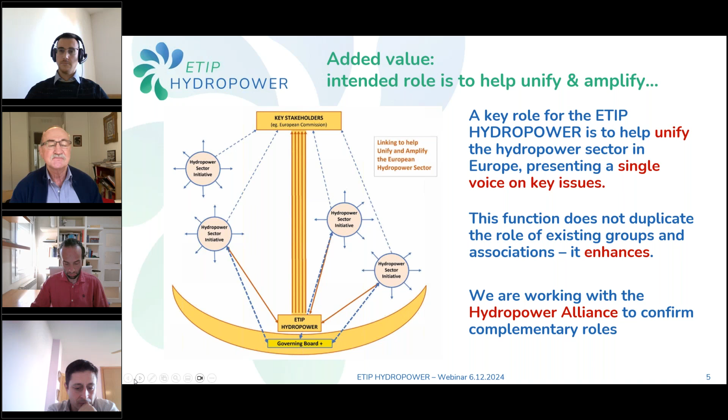What we have done, important for all those working on research projects, is establish a HERI platform which gathers all research projects ongoing in Europe. We try to gather all of them in our platform, not only at the European Commission level, but also what is going on in the different European countries.

We have also established 4 working groups, active since early summer this year. The first is hydropower's role for flexibility and storage, then hydropower and biodiversity, and third, hydropower and climate change. Then we have a cross-cutting working group on promotion, dissemination and uptake of past and current European research and innovation projects, which organizes these webinars. The working groups will publish first results during our Hydropower Day, on 8th of April next year in Brussels.

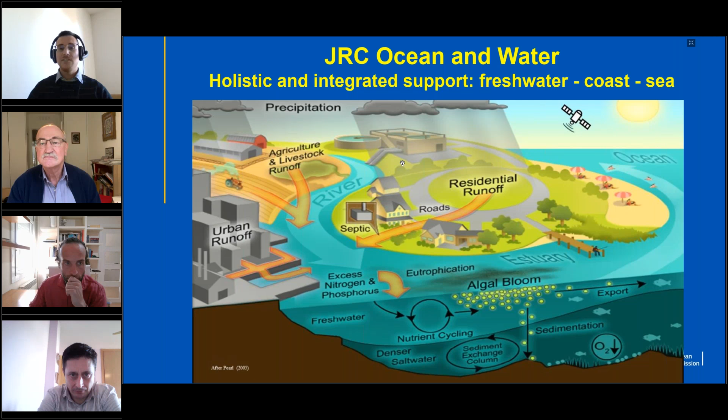Today we'll present several activities we are conducting at the Joint Research Center of the European Commission, in particular this recently published annual report. I work at the European Commission, in the Ocean and Water Unit, where our aim is to support the policy-making process by providing scientific and practical evidence to policymakers. My Ocean and Water Unit is in the Joint Research Center of the European Commission, which is a directorate of the European Commission. Here you can find some of the water legislation we have supported with our scientific research, ranging from water in agriculture to ocean, hydropower, rivers, and so on - all kinds of waters.

Today I will talk about a different activity. I will provide a summary of the exploratory activity where we assess the European Union's potential of new sustainable hydropower, in particular hidden hydropower. Then I will talk about water energy storage in pumped storage hydropower, which was published a few days ago. And then the main topic is the Clean Energy Technology Observatory report, an annual report on hydropower and pumped storage hydropower.

A slide to present the already finished exploratory research on sustainable hydropower. I already presented this result in past webinars and conferences, so I will just provide a summary here. We have discussed and published several results, for example on the potential of refurbishment of existing hydropower plants in the European Union. We have also provided an assessment on the use of hydropower in historical non-power barriers and non-power dams. We've investigated the potential for hydrokinetic turbines and also hidden hydropower in water distribution networks and wastewater treatment plants. I could provide references, but also in the report I will discuss there is a table with all these solutions, discussion, and data, like the additional energy generation we can obtain by these strategies.

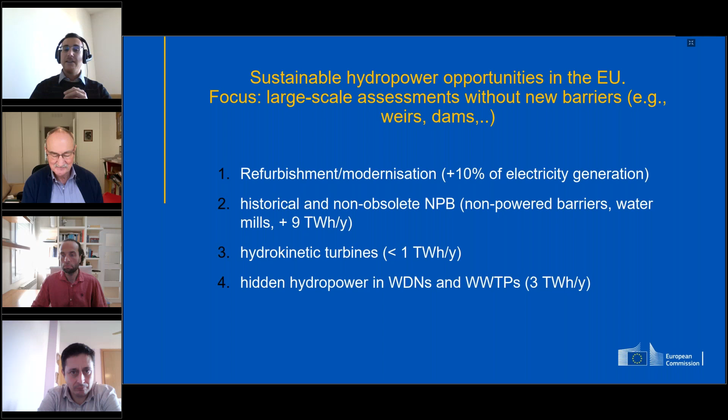Another important activity we have finished is the quantification of energy storage in hydropower reservoirs and pump storage hydropower. We found that in literature there are several sources of data, and often these sources provide different data. Sometimes this data on energy storage is not well defined - it's difficult to understand, for example, if they include the cascade effect or not, or if they are talking about a theoretical energy storage capacity or a technical economic one. So we tried to bring some order to this and published it a few days ago.

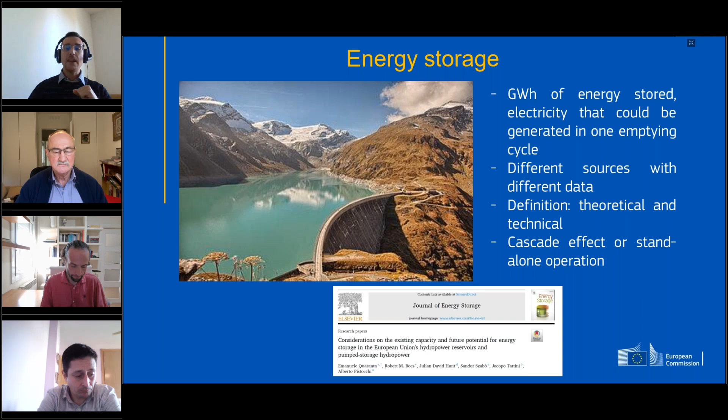Here is a summary of our results. We provided data and calculations both for pump storage hydropower and also for traditional reservoir hydropower, calculating a sort of theoretical energy storage, which is practically the head multiplied by the volume of the reservoirs. Obviously, the smaller reservoir limits the potential. Then we corrected this theoretical energy storage potential, calculating a technical energy storage potential, considering some reduction coefficients, for example the efficiency, or the fact that not all the volume can be used for safety reasons.

We compared this number with the reported energy storage capacity found in literature. We found that there is agreement, but also some differences, and these differences are well discussed in the paper. I will not go into details now, otherwise it will take hours, but you are encouraged to read the paper and provide your feedback and constructive criticism. It's important to show this data because by comparing this number with numbers from other studies that show the future potential, it's possible to understand really how much the future potential is.

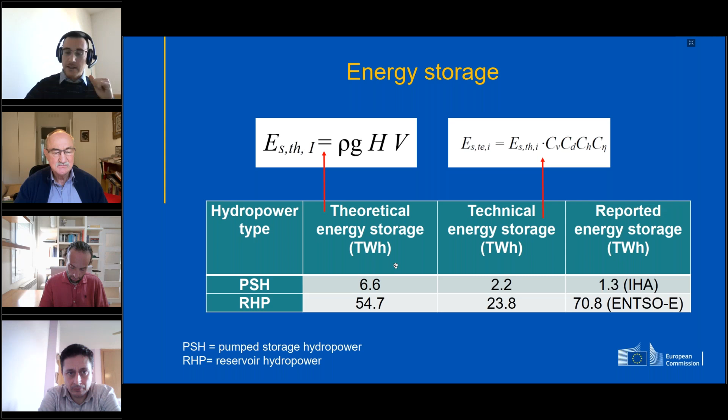This is shown in these slides. Here is the energy storage capacity in existing pump storage hydropower plants, the theoretical potential I showed you in the previous slide - this number, 6.6, is this one. This is a logarithmic scale. Here you can find results from other literature studies that have identified the future possible potential of developing new pump storage in the European Union. You can see that the opportunities are a lot - the available potential that can be exploited, the sum of all these strategies, is much larger than what we have. So technically speaking, in the European Union, there is still potential for new pump storage hydropower.

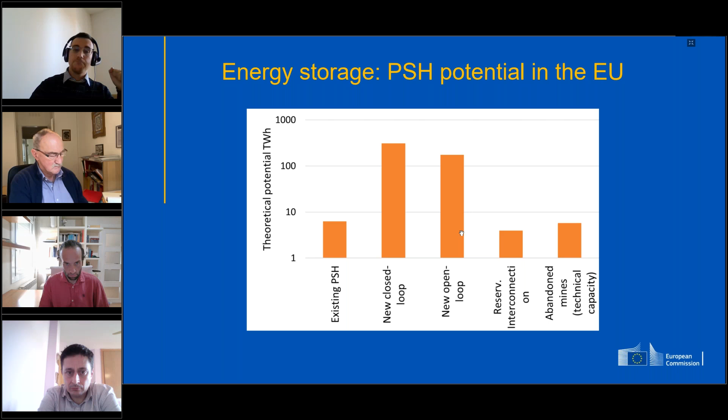For example, from new closed loop pump storage or new open loop systems, but also by interconnecting reservoirs or by using abandoned mines. The problem is that most of this potential currently is not economic because of market limitations, but there is a potential.

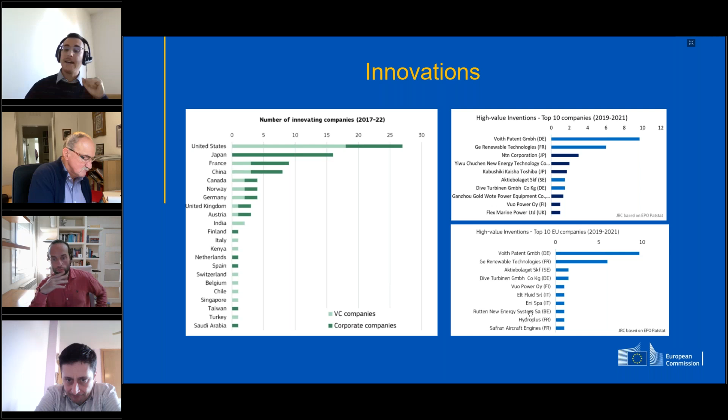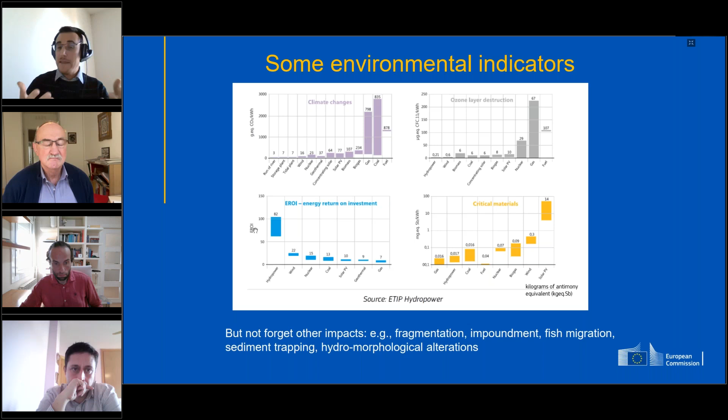Here you can see a picture about some environmental indicators of hydropower. I took this picture from the report of ETIP Hydropower, so thank you ETIP Hydropower, Hydropower Europe, for sharing this report with these useful pictures. You can see that hydropower has better quality in some environmental indicators than other energy technologies. If we look, for example, at the greenhouse gas emission per kilowatt hour, or land use emission, or the energy return of investment, we see that hydropower has the best indicator. However, we must not forget there are also impacts associated with hydropower not captured by this picture, like fragmentation, fish migration, and so on. So it's very important to implement mitigation measures.

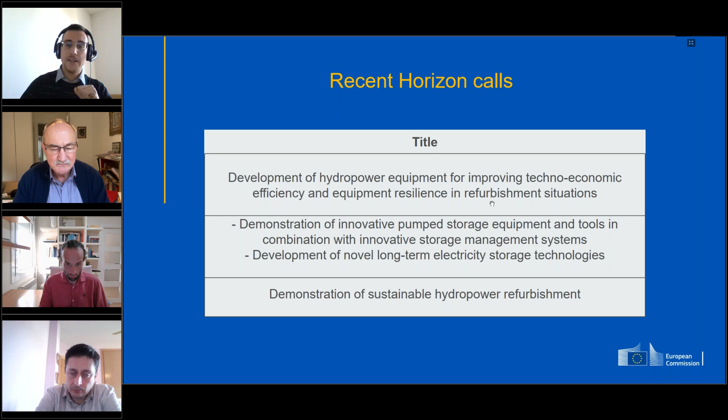So now I come to the core of this webinar, the presentation of these 3 new funded Horizon projects: RevHydro on the revolutionary refurbishment for an efficient and eco-friendly hydropower, SHERPA on a new solution for hydropower plants to enhance operational range performance and improve environmental impact, and STORY-HY, innovative storage technology and operation in hydropower.

And as you can see, the topics of these projects align well with all the discussion, all the data I showed you about the European Union: innovation, energy storage, and also reduction of environmental impact.

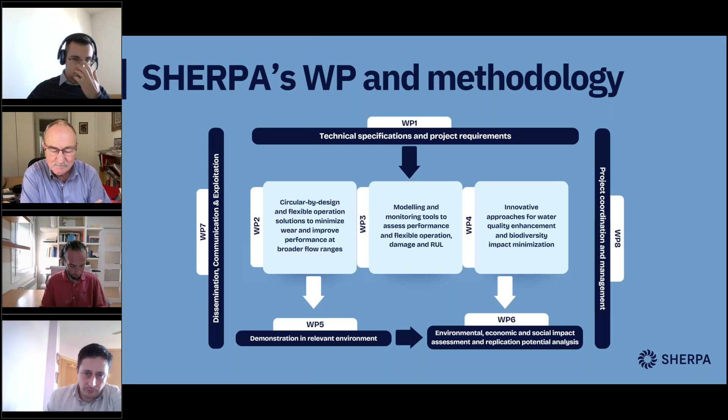Now we are going through some of the pilot plants. Iberdrola Hydropower, as operator of almost 12,000 megawatts in Spain and Portugal, is going to use our own stations. We have selected some stations with real needs from the Mediterranean Basin and the Seal Basin, and maybe others that are now under assessment.

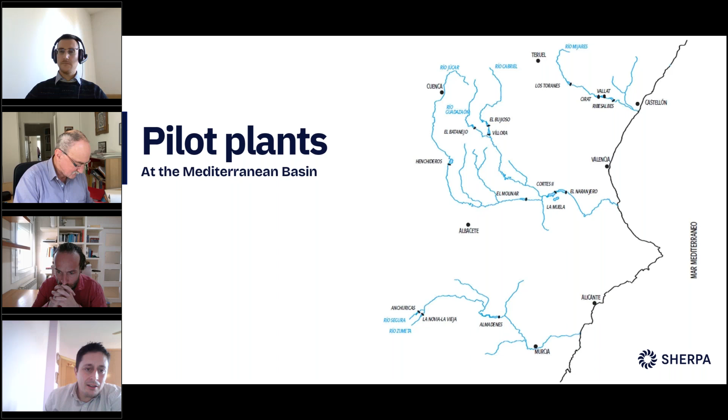I would like to show some of them with some nice pictures of these stations, to let you know that for this topic we are looking for the main objectives: operating the units in really deep part loads without any significant troubles, and with minimum changes.

And for some of them we are going to assess changing or using new hydraulics, or applying additive manufacturing.

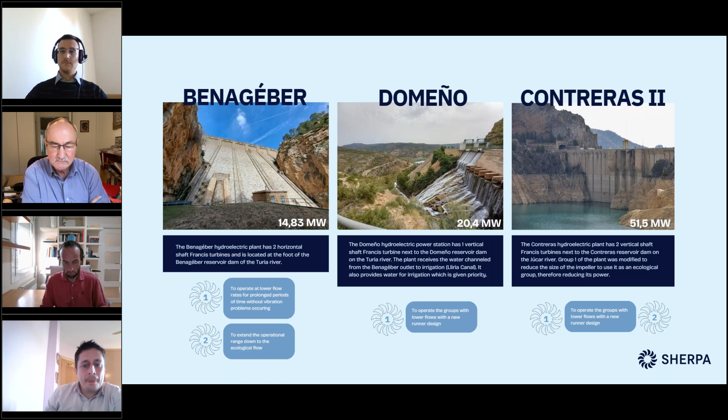More places - I mean, we are now in the first working package, so we are in the time of definition of requirements, discussing with all the partners of the consortium to know where it makes sense to apply each objective. So we are going to go through all of them, making a comprehensive and full assessment, and afterwards putting efforts into all of them, or at least some of them.

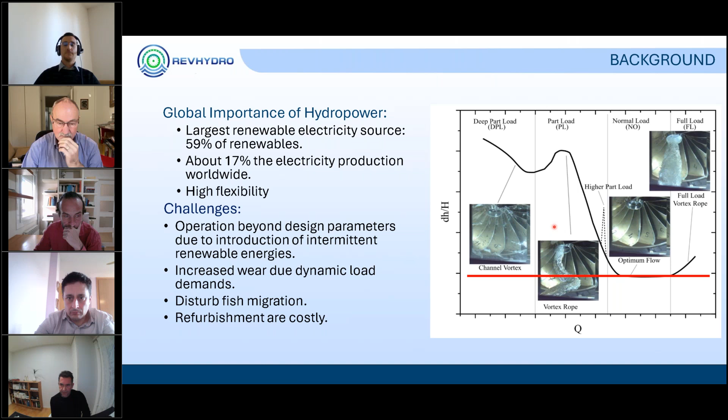So in order to achieve this type of goal, we have three specific objectives in the project: the development of some flow control technology, some fish barrier technology, and some circular economy approaches.

In terms of flow control technology, we have two technologies which will be developed. The first one is in the draft tube, which consists of some guide vanes that can be radially adjusted to mitigate the pressure pulsation at part load operation due to the rotating vortex rope, and which also have variable porosity. The second flow control technology consists of a smart add-on, which will be installed on the runner in order to decrease the interblade vortices and the fatigue.

These three components will be adjusted depending on the fish species, the maturity of the fish, and the environmental conditions. So we will have an adaptive system.

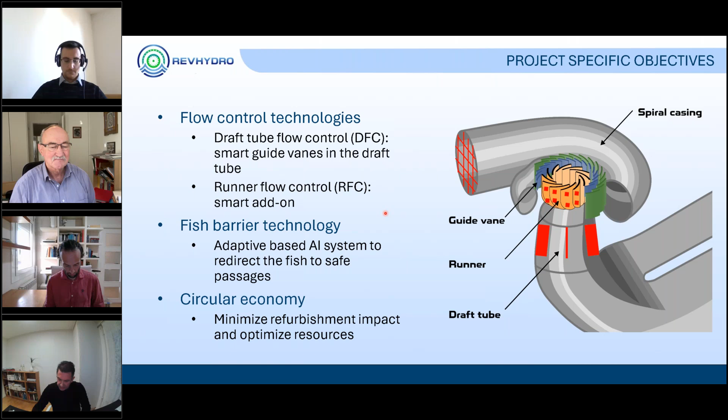So in terms of circular economy, we aim to minimize the refurbishment impact and optimize the resources. To this aim, we will develop a generic methodology to study and optimize refurbishment procedures. We will have life cycle analysis, life cycle inventory, and life cycle costing studies performed, and a systematic approach for maintaining and extending the lifespan of critical hydropower equipment will also be developed.

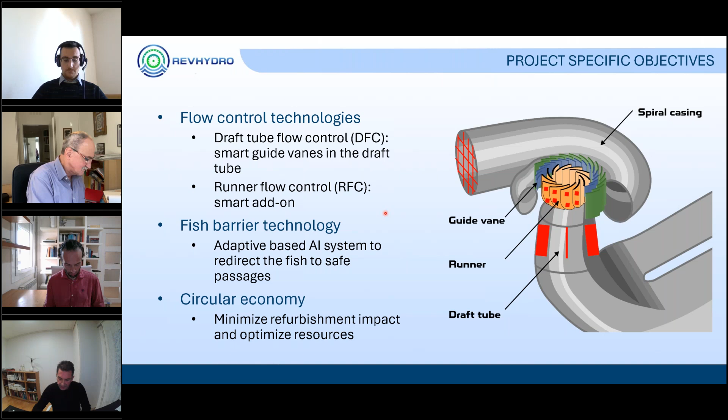So if we look at the structure of the project, we have 6 working packages. We have the standard working package for the management, and one for the communication, dissemination, and exploitation.

Related to the specific objectives, we have working package 1 dealing with the development of the runner flow control, with experimental investigation and numerical simulation focused on deep part load operation. WP2 deals with development of the draft tube flow control, also with experimental investigation on model scale and numerical simulation, focused on part load operation.

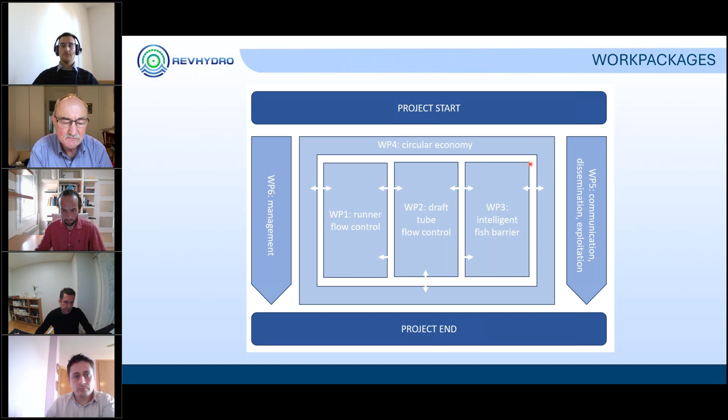In WP3, the intelligent fish barrier will be developed, with extensive experimental investigation using living fish. Finally, working package 4 is related to circular economy and will be led by RSIM.

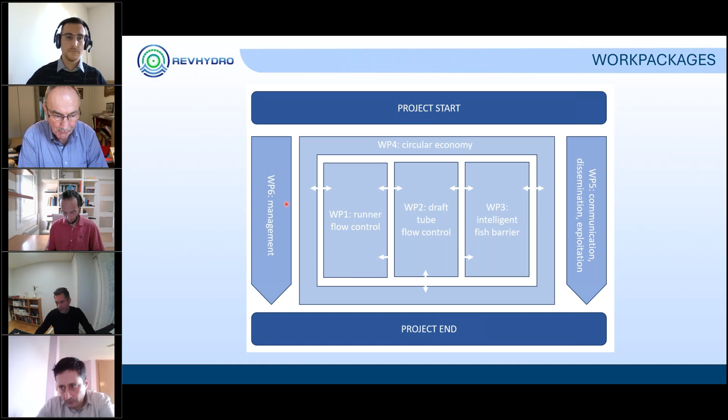WP1 will be led by General Electric, WP2 will be led by Luleå University of Technology, WP3 will be led by ICPE, WP5 will also be led by RSIM, and WP6 management is LTU, which is coordinating the project. In terms of workforce, we have a total of 430 person months.

The extension of the operating range of Francis turbines and efficiency is quite an important topic in the project, because WP1 dealing with runner flow control stands for 30%, and WP2 dealing with draft tube flow control also stands for nearly 30%. Together, the extension of the operating range and efficiency stand for about 60% of the workforce.

The development of the fish barrier will stand for about 15% of the workforce, circular economy a little less than 10%, and WP5 and WP6 dealing with dissemination and management will stand for a little less than 20%.

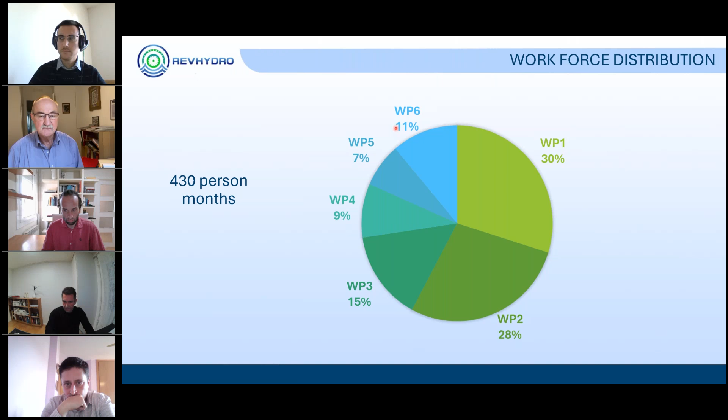So in order to track the progress of the project and to align all the partners, some specific key performance indicators have been developed.

For WP1 and WP2, we expect to predict the pressure fluctuation and the strain from the numerical model within plus or minus 20% of the experimental results. We also expect to predict the fatigue within plus or minus 20% of the experimental measurement. This modeling is quite important to develop the runner flow control device and the draft tube flow control device, also for optimization purposes.

In terms of efficiency and resilience, we aim to expand the operating range by 50% with the flow control devices that will be developed, and decrease fatigue by 80% at part load and deep part load operation. This will allow us to extend turbine life by 25%. It's also important to allow an increase by one order of magnitude of starts and stops without additional fatigue.

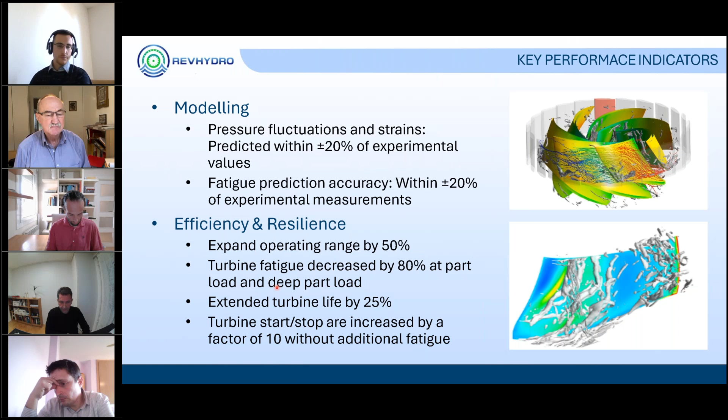In terms of key performance indicators for environmental impact, we have some ambitious KPIs. We expect to be able to redirect 95% of the fish from the turbine intake with the fish barrier system.

In terms of circular economy, for the refurbishment we aim to decrease carbon dioxide emissions by 30%, reduce resource consumption by 25%, reduce operating expenses by 20%, and capex by 50%.

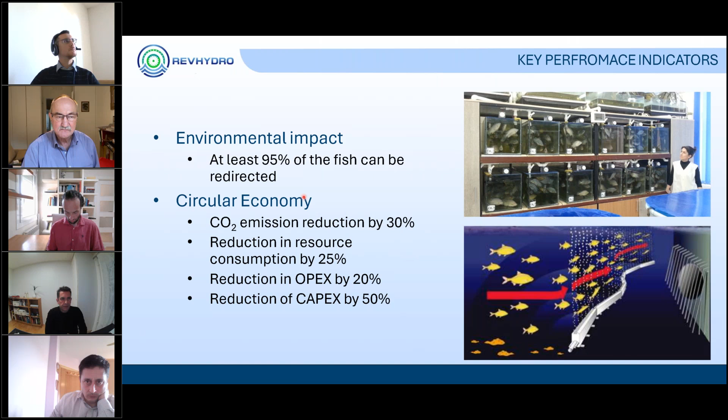In terms of expected impact, we expect to increase energy efficiency. By reducing harmful off-design operation, the refurbishment will improve energy production efficiency by up to 10% in certain operating conditions. In fact, I think this number is quite conservative if the flow control device works as we're expecting it to.

We will extend the operational range and lifespan of the turbine, so the refurbishment will expand the operational range of turbines by 50% and increase the lifespan by 25%, reducing the frequency and cost of overhauls.

As mentioned, we will also enhance biodiversity protection with the fish barrier, which aims to redirect up to 95% of the fish away from the turbine intake. And we will lower costs for refurbishment through circular economy methodology.

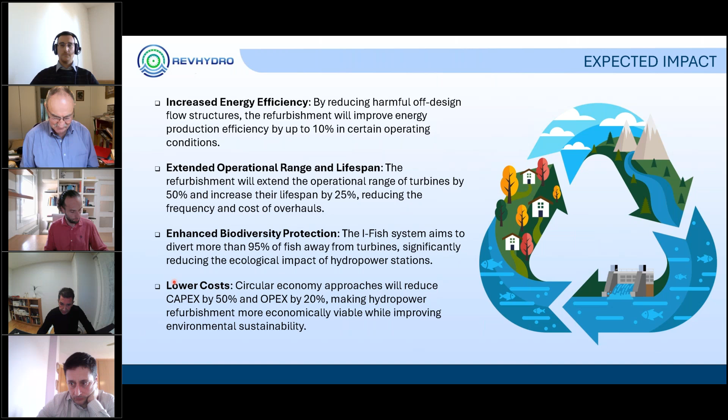The project is newly started, so all the social media are not really online at the moment. Within some time, everything will be in place. Thank you very much.

Thank you very much, Michel. So also this project is very promising. The purpose of this webinar is to increase awareness of recently started projects, and also the one we just heard about before. We are also looking forward to getting information about the first results, for example next year in one of our webinars. So thank you very much again, Michel.

We come now to the third presentation, which will be given by our next speaker. He is associate professor at the Universitat Politècnica de Catalunya and director of the CDIF-UPC research group. Please, go ahead.

Yeah, I'm not sure if you can see my screen. No, not yet. Ah, okay. Now I think.

Now we can see, yes. Can you see it in presentation mode now? Screen, yes. Oh yeah. Okay, so let me... okay.

So thank you for the introduction, and I'm going to start by presenting the project STOR-HY.

Well, I will speak first a little bit about the call, because we believe the call has some particularities. It's about pumped storage, basically. I want to highlight and explain to you the reasoning behind the proposal and the reasoning behind some of the demonstrators that we chose.

We'll present the consortium STOR-HY, the outcomes, and then the expected impacts and the strategy.

So first of all, if we look at the goal we were targeting with this project, there were some keywords which I put here to summarize. One of them was increased availability of pumped storage, reduced OPEX and CAPEX in operations of pumped storage, and improved efficiency.

Also, Manuel has shown his report about how European industries are very competitive in hydropower. It's important to maintain that competitiveness and keep it in a good way. And finally, the sustainability of the innovative technologies, to summarize some important aspects of the call.

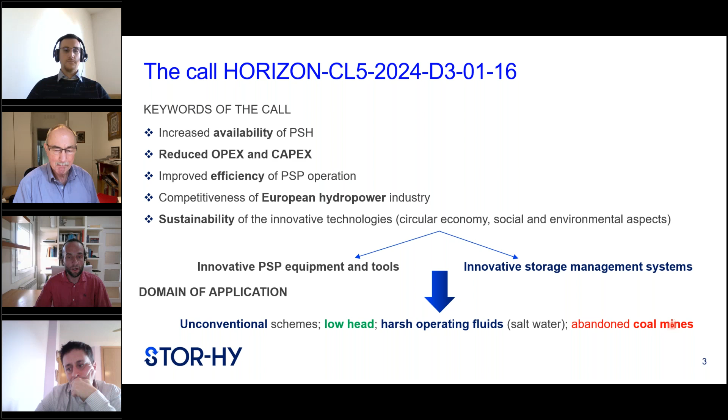We also have partners from Switzerland and one from Norway. We have partners from Spain, France, Portugal, Germany, Netherlands, and Belgium. We have many universities and RDI centers all around Europe.

We have two big utilities in hydropower with a long tradition of participation in Horizon projects in the hydropower context, such as EDF and EDP. We also have HUNOSA - I'll explain a bit later, when discussing the demonstrators, why HUNOSA is here.

Also, we have two important manufacturers, Hydro and General Electric, industrial developers such as Sener, Kaizen, Sadim, and we also have partners for the exploitation and dissemination of the project's results.

So when targeting the outcomes for our STOR-HY project, the first thing is to understand, from the techno-economic, regulatory, and environmental point of view, what the requirements would be for new pumped storage equipment and tools. This will be a dedicated part of our work - it will be the second work package.

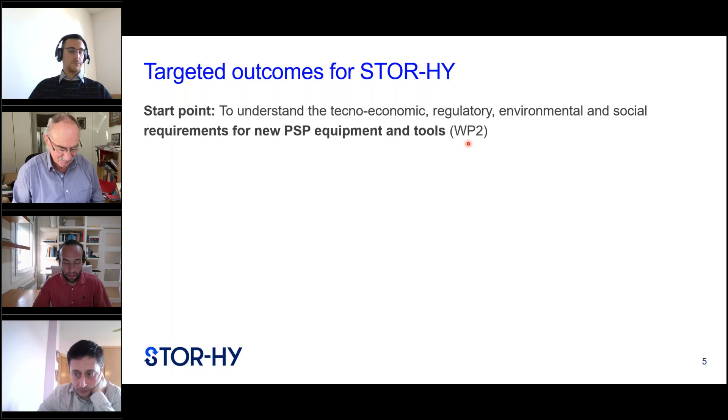Later I will present the work package structure. Based on this previous analysis, which has already started, some things we will target are CAPEX and OPEX reduction of existing pumped storage hydro plants, and increasing operational capacity of pumped storage - which is also very important, because we believe one direction we should move in is adapting pumped storage to harsh conditions.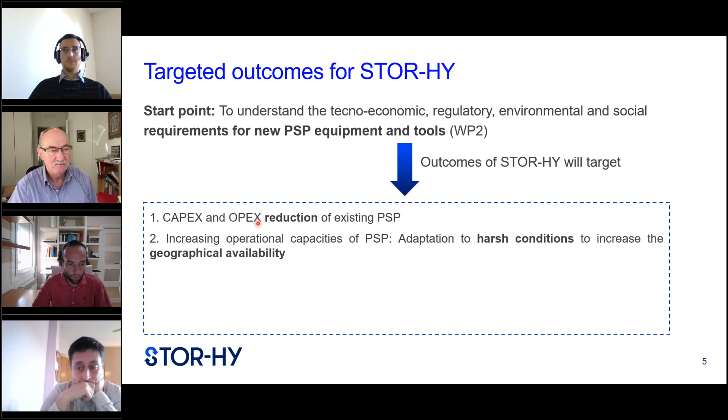For example, saltwater could be one direction. This would also increase the future geographical availability of pumped storage. Also, improving digital operational tools - we will have a package dedicated to digitalization of hydropower.

And also, from the existing pumped storage plants we already have, we will propose ideas to boost and improve the site utility with low CAPEX cost. Finally, it's important to keep in mind that what we are developing in STOR-HY, we want to be ambitious.

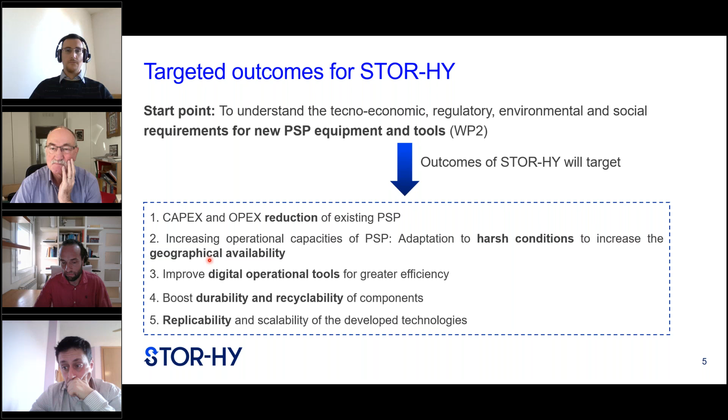We want these technologies to be replicable and scalable to other demonstrators and to other sites, not only in the sites where they will be tested. So this is the look of the expected results, an overall scheme of the results. As I mentioned before, we can identify two directions.

One is pumped storage equipment and tool, and the other is storage management system. That's why we put our technical results in these two big pillars, what we call technological pillars. One is more on the technologies and tools, which has to be adapted to unconventional storage schemes and harsh fluids. The other is the operational and strategical management optimization.

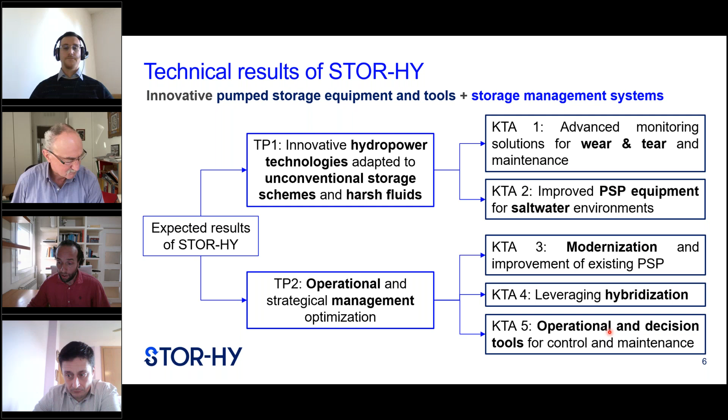For each of these technological pillars, we have key technological areas. For example, here we have wear and tear monitoring and evaluation, improved PSP equipment for saltwater. In this technological pillar of operational and strategical management, we have the modernization and improvement of existing PSP. We will also have demonstrators hybridized with battery and solar panels, so how to leverage hybridization to improve the operation of these sites, and finally to develop operational and decision tools for control and maintenance.

So basically, this is an overview of the 16 technical results, and as I said, they are all classified in one of these two technological pillars and in one of the key technological areas.

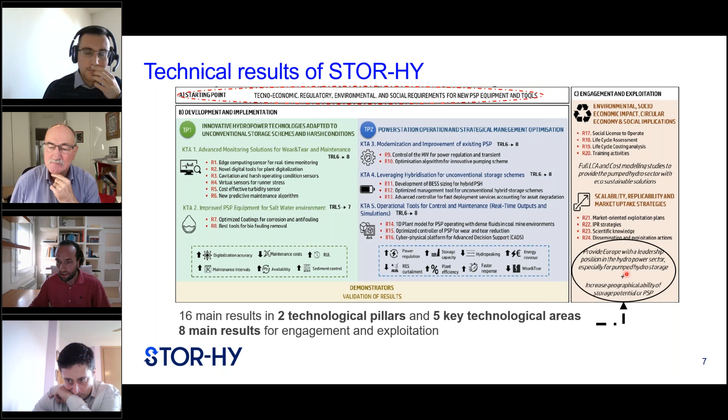Besides these technical results, we have some ways to quantify the engagement and exploitation of the project. These results are defined here. The structure, as my colleagues from the other projects, Michel Cervantes and Ademir, have shown in their respective projects, follows a similar approach, typical in this type of project, with project management and communication and engagement, which is kind of a transversal thing. But I will comment on the particularities in our project.

We will start with techno-economical and environmental, social requirements. This work package will have a lot of activity at the beginning. This would be the technical core of this project, one work package dedicated to digitalization, to develop digital tools that allow informed decisions and improved control. This is something that will be addressed in this work package.

Here we have improved technological equipment for harsh operating fluids, particularly saltwater, because we will have one demonstrator which uses saltwater, as I will show later. And since this project is a TRL 8, technology readiness level 8 project, we need to test and validate the technologies we are developing in a relevant environment, in real demonstrators. So we have a lot of activities which will be tested and validated in the demonstrators.

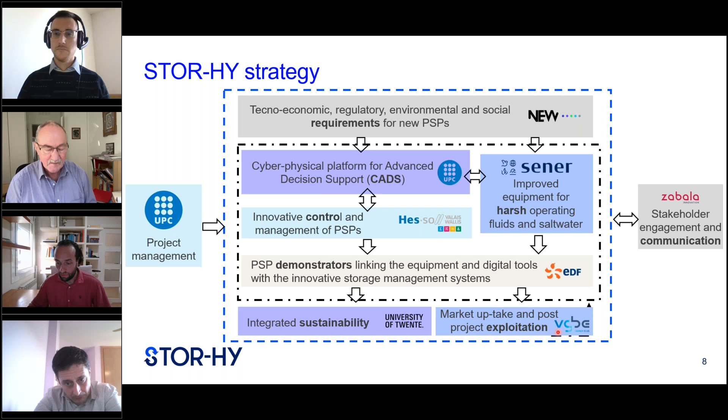We also have one work package dedicated to sustainability. For that, we have, for example, University of Twente, experts on that type of evaluation. And we also have the exploitation of the project led by VGBE.

A little bit more into detail on the core technical part, this is more or less our approach. We will have the demonstrators. Our project is centered on the data, on the real operation of demonstrators. With the demonstrators, we can gain data, but it's important to understand which data is relevant for our purposes, how to monitor it, which signals are important to monitor, how to digitalize hydropower at the end. This is one key aspect.

Once we get to this monitoring phase, the next part is what to do with this data, and this is a big part of the work here. We will use classic approaches such as CFD and FEM tools, although, as Michel Cervantes has shown, it's very challenging to simulate some types of conditions.

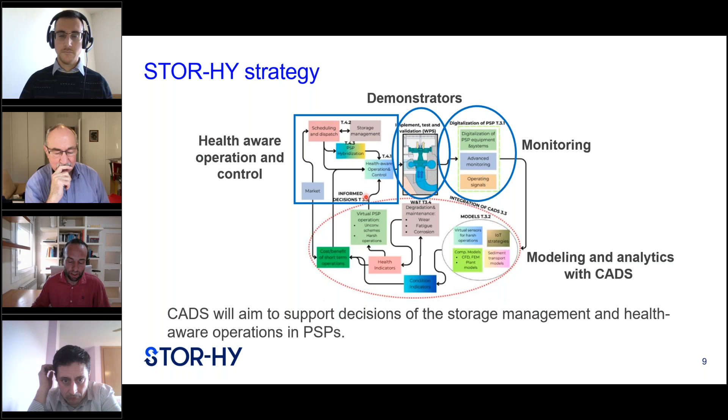We also want to develop sediment transport models, the concept of virtual sensors, for example, for predicting stress and strain in the turbine, based on AI techniques. And based on this modeling, we want to develop meaningful condition indicators that will support and improve the operation of the pumped storage plants.

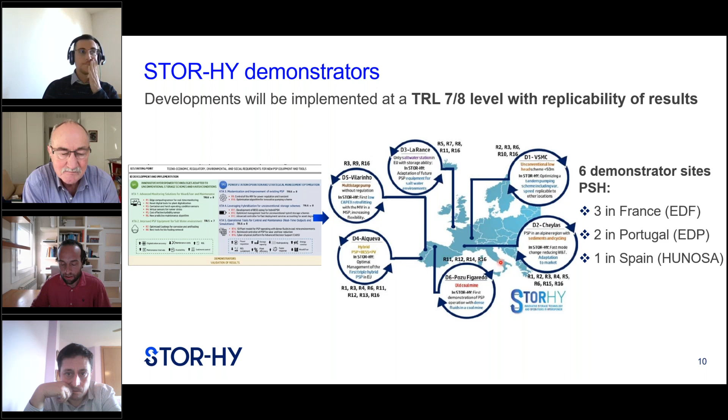Now I will speak about the demonstrators. We have 6 demonstrators in this project, 6 PSH sites: 3 in France, 2 in Portugal, 1 in Spain. I will go into detail in the next slide, but before that I defined the results, and here we are explaining where these results will be addressed or tested. We wanted to have some replicability of the results, so if we develop one important result, we want to test it in more than one site with different characteristics, which makes things more valid.

Looking at the demonstrators, as we saw in the call, it was somehow required that we should address unconventional storage schemes or at the same time harsh operating fluids. These are our demonstrators.

3 of them are in France, provided by EDF. The first one is a cascade of 3 reservoirs. You can see these 3 levels, these 3 reservoirs. Here, what will be done is how to optimize the management of water and also in terms of energy of this system of 3 cascades, because EDF will install a new turbine between the top reservoir and the Saut Mortier.

The other one is a more classical scheme, very close to Grenoble, 250 meters, 250 megawatts. Here what we are addressing is the harsh operating condition, because we want to increase the number of starts and stops to be more available and responsive to the market. Also here we will address the topic of sediments, because in some situations these waters can have problems with sediments.

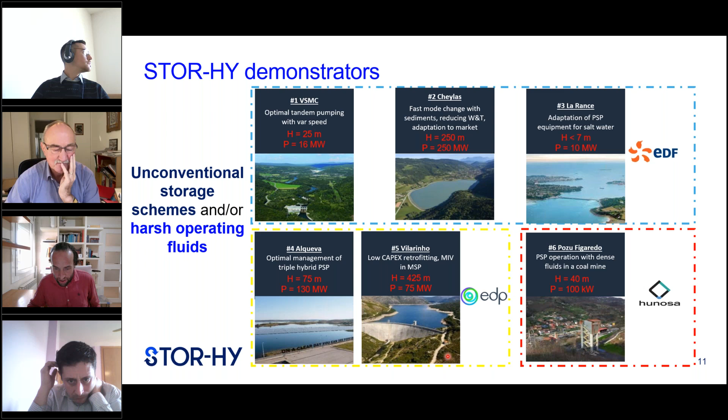The other one is a multi-stage pump. As you may know, most multi-stage pumps were commissioned many years ago, and at that time they were commissioned with a fixed operating point, meaning they are not able to regulate. In this case, what we want to test is a low capex retrofitting in order to be able to regulate the power of the units working as turbine. This will be done or tested by the main inlet valve.

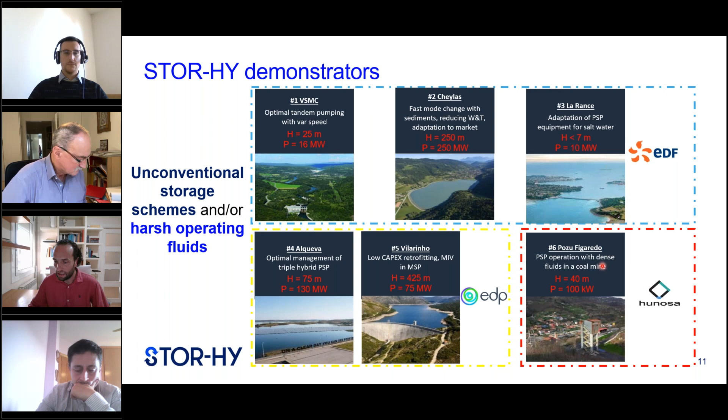Finally, this will be a small pilot, but also interesting we believe: the pilot provided by Hunosa called Pozu Figaredo in the north of Spain, particularly in Asturias. Asturias used to be an area with high industry penetration of coal mines, but the direction is to decommission coal mines. Now we have places and infrastructures which could theoretically be used to develop new pumped storage places. So in this case it will be a small pilot, 100 kilowatt, but in a relevant environment, an abandoned coal mine, and we want to test the pumping with dense fluid.

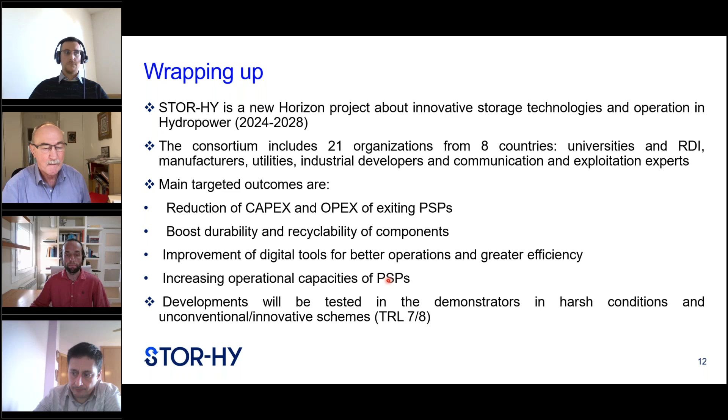So this is the last slide. Wrapping up, STOR-HY has already started, as the rest of the projects we have seen today. It will last 4 years, from 2024 to 2028. We are a consortium of 21 organizations, and we target the reduction of CapEx and OpEx to boost durability and recyclability of the components, digitalization, improve digital tools for better operation and greater efficiency, and as the ultimate goal, increasing operational capacities and geographical abilities of pumped storage. I think that was all.